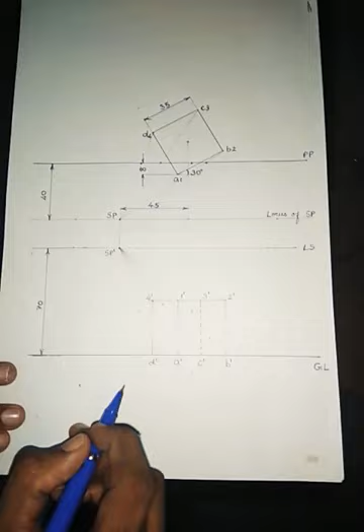We are again going to draw perspective projection of a cube. Earlier also we had drawn perspective projection of a cube. In that figure, one vertical edge of the cube was touching the picture plane. Now the difference in this figure is that one vertical edge of the cube will be some distance in front of the picture plane. Okay, now read the question.

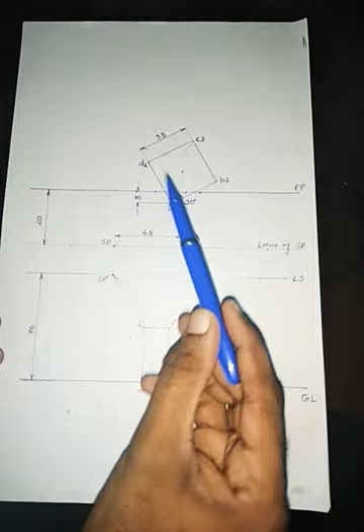We are having a cube of edge 35 mm, and it is said that one vertical edge of the cube has to be placed 8 mm in front of the picture plane. And at the same time, the vertical face containing that edge should be inclined 30 degrees.

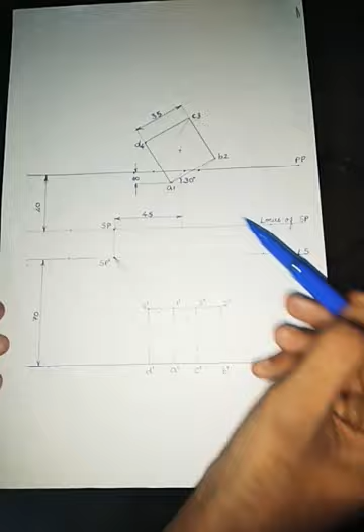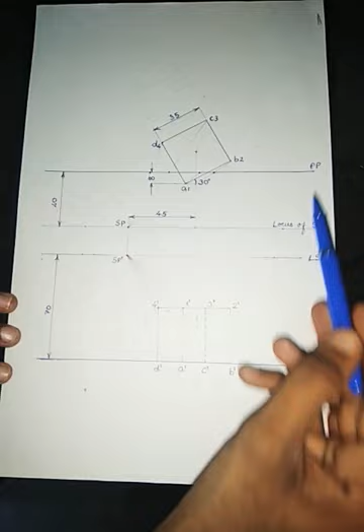So before that, first we can draw all the lines. It is specified that the station point is 40 mm in front of the picture plane and 70 mm above the ground line. So as usual, we will start with our ground line. You mark locus of line of sight, or the horizon line, 70 mm above the ground line. You can leave any distance you like, 20 mm gap. You can draw locus of station point and then 40 mm below the picture plane. So first we will be drawing all 4 lines as we have done earlier.

After that we have to locate first the point A1, the first vertical edge. It should be 8 mm in front of the picture plane. So you mark a point 8 mm in front of the picture plane. Through that you draw a light horizontal line and from there you have to start the edge A1.

Now one vertical face should be inclined 30 degrees to the picture plane. So from this point you draw a 30 degree line and then you complete the cube. The edge of the cube is 35 mm, so first we will be drawing the cube.

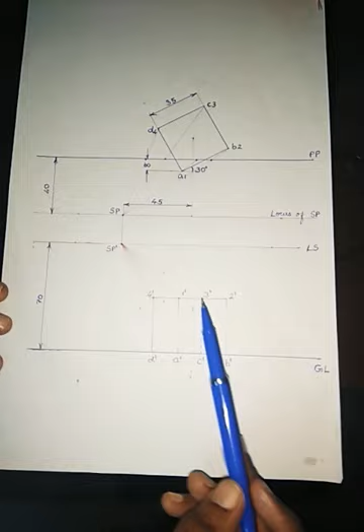We will be drawing the top view of the cube above the picture plane, but one vertical edge has to be 8 mm in front of the picture plane. After that, as usual, we will be drawing its front view. The height also is 35 mm, so we will draw the front view too. We will get A dash, B dash, C dash, D dash and 1 dash, 2 dash, 3 dash, 4 dash. After that we can locate our station point.

Station point should be 45 mm to the left of the center of the cube. So find the center and project it from there. You take 45 mm towards the left side. We will be getting SP, station point. Exactly below SP, we will be getting SP dash. Now as usual, we will be proceeding as we have done in the previous problems.

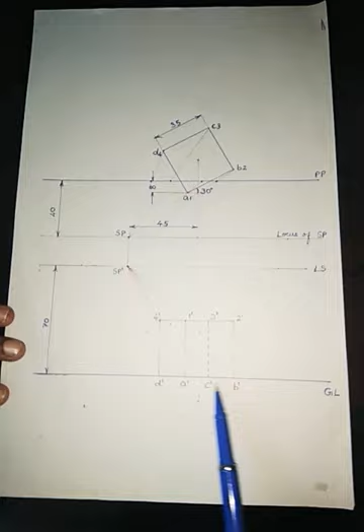First, we will be joining all the points of the top view: A1, B2, C3, D4. All these 4 points should be joined to SP. Similarly, all these points A dash, B dash, C dash, D dash and 1 dash, 2 dash, 3 dash, 4 dash have to be joined to SP dash. We will do this as we have done in the previous problems, and then we will project the points as we have done earlier.

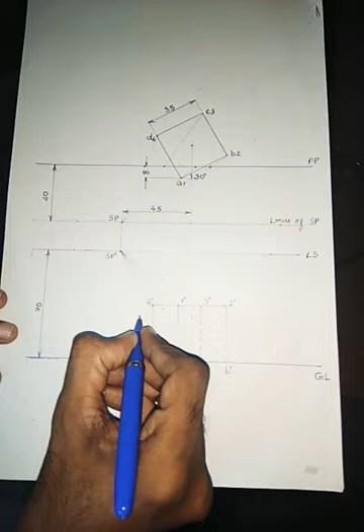So this line is touching the picture plane at this point. This is the edge joining D4. You project it downwards till it touches the line starting from D dash and 4 dash. So we'll be getting a point here, and a point here. So this will be capital D and this will be capital 4.

Next we can project C3. Again, the line joining C3 is touching the picture plane at this point. Project it downwards; it has to be projected till the line starting from C dash SP dash and 3 dash SP dash. So we'll be getting a point here, and a point here. So this will be 3 and this will be capital C.

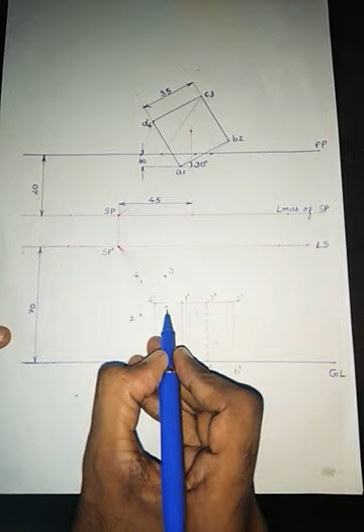Next we can project B2. The line joining SP and B2 is touching here. Project it downwards. We'll be getting a point here, and a point here. So this is capital B and this is 2.

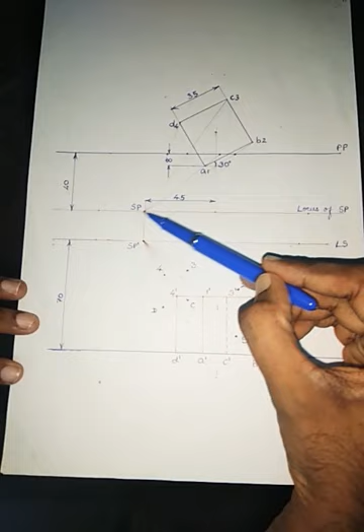Now the specialty of A1: A1 is not touching the picture plane. First, as usual, you have to join SP to A1, but this line is not touching the picture plane. So what you have to do is, after joining SP to A1, extend that line till it touches the picture plane. You will get a point here, and you have to project this point towards the front view. Again, as usual I will project this point towards the front view, but the line joining A dash and 1 dash to SP dash won't meet there.

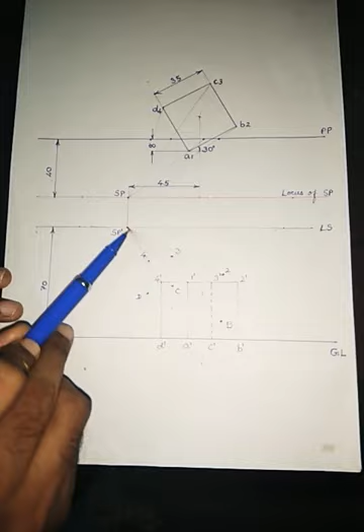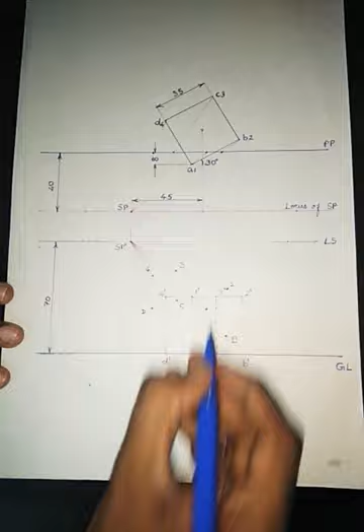So what you have to do is extend this line backwards. The line joining SP dash and 1 dash should be extended backwards and projected till this line. We will get a point here. Again, this line also has to be extended backwards, and project this point downwards. We'll get a point here. So we'll be getting capital A here and 1 here.

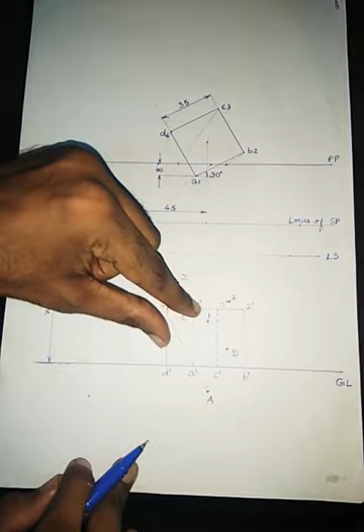So this is the specialty of this point. For projecting and getting A1, I'll be joining SP to A1, extending it till the picture plane, and then projecting that. For getting these points, I have to extend this line backwards. Once I get all these points, you join them as we have done in the previous problems.

First you have to join the outermost points: join A and D, join A to B, then B to 2, 2 to 3, 3 to 4, 4 to D, and then check the visibility and join the other lines.

A1 will be visible, C3 will be invisible, and the base will be invisible, and the top face will be visible. So we'll be getting a figure like this at the end.